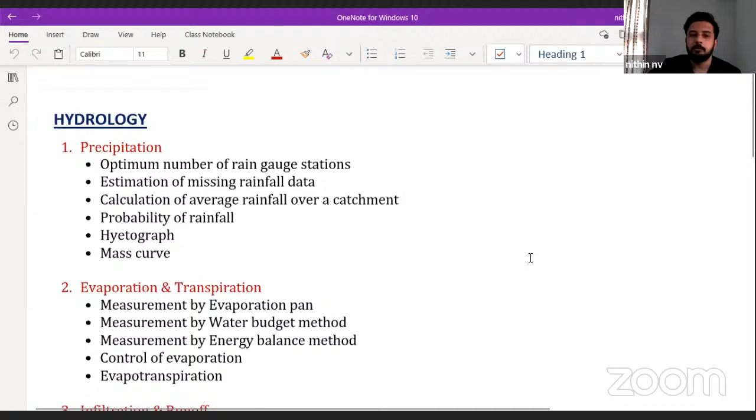Then coming to infiltration and runoff. I'm just giving a basic introduction so that once you have prepared, you can go through this portion and check whether you studied this point, this point, this point, like that.

Horton's infiltration curve is very, very important for gate examination. Similarly, phi index, W index, that is also very important. Then calculation of runoff, it is a subtopic of Horton's infiltration curve and all, is also repeatedly asked for 2 marks, which we are going to see through questions.

Then coming to hydrograph, I can tell you this is the most important chapter in hydrology. Sometimes they may ask from other chapters too. Flood hydrograph, direct runoff hydrograph, unit hydrograph - these three things are the topics we are going to study.

The other topics which I have written are the applications of unit hydrograph. We are going to see each and everything, method of superposition, when we are going to use this, how to approach a question. That is very important in hydrograph.

Whenever you are seeing a question, you should decide in which way I have to proceed. That is very, very important in hydrograph. That's what most students are making mistakes in the examination hall. You have to decide, or understand how to approach a question. Very important in hydrograph, that we are going to discuss.

Then coming to well hydraulics, sometimes you might have studied some portion of well hydraulics in geotechnical engineering also. Regarding aquifer, we have to study - aquifer can be unconfined or confined, that we are going to study. Recuperation test is a comparatively less important topic, but that also we will discuss. There is a chance of asking 1 mark or 2 mark question from there also.

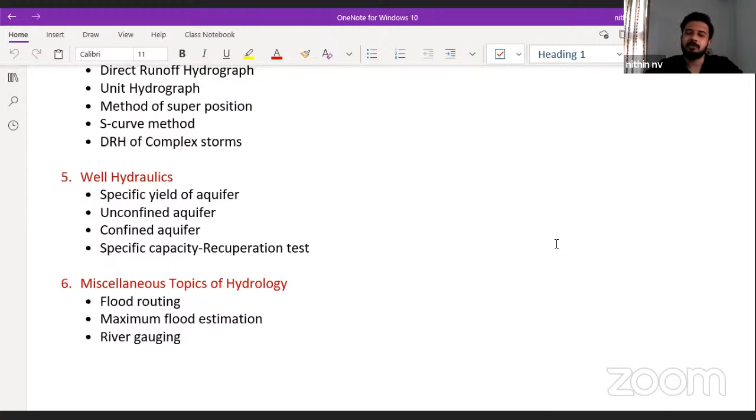Then coming to some miscellaneous topics, not that important, but some portions under this - flood routing, especially Muskingum method and all, repeatedly asked for 1 mark in competitive exams. Gate exam also they have asked. We'll do some numericals also under this flood routing. And regarding maximum flood estimation and river gauging, we'll discuss a few points which can appear in the gate examination.

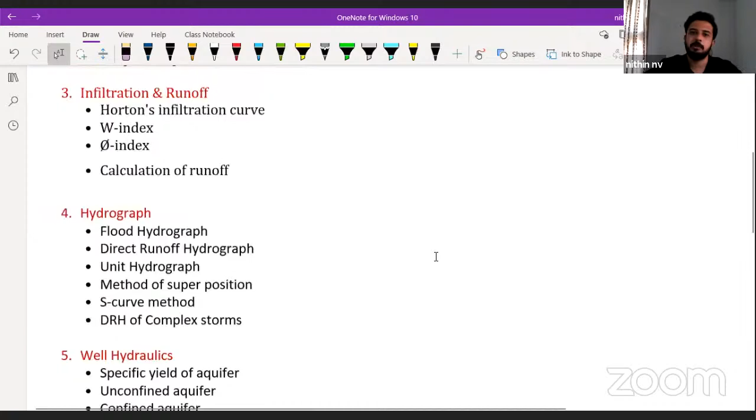So these are the topics we have to study very importantly under hydrology. Then irrigation - I have not written the subtopics here. Irrigation, definitely we are going to cover in the next session, part 2, which is going to happen tomorrow at the same time. And then I will discuss what are the things we are going to study under irrigation.

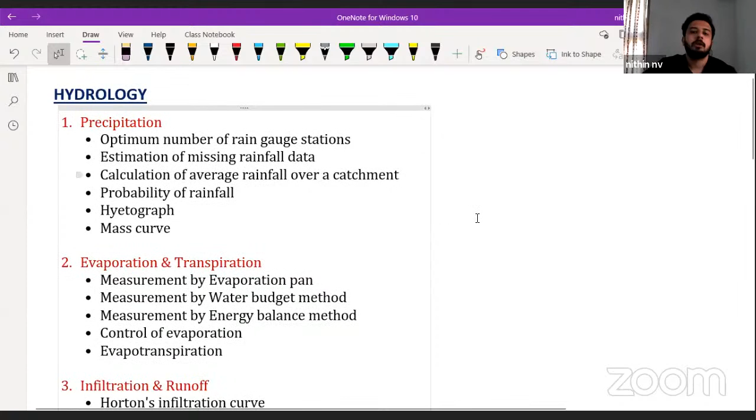In today's session, we will try to cover as many topics as possible under hydrology. We may finish with hydrograph only, because so many topics have to be studied under hydrology, that one by one we will study. Finally, at the end of the session, definitely you will be in a position to solve whatever questions they are going to ask in the examination. So I hope you got a rough idea regarding the hydrology portion.

Then directly we can go to the first topic, nothing but optimum number of rain gauges.

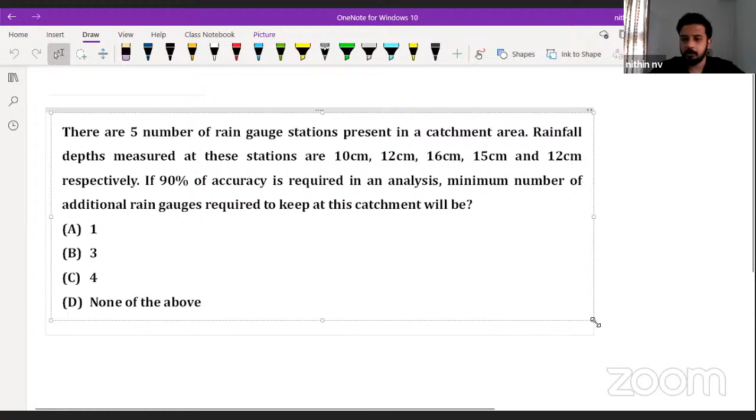I hope you have gone through it. No need to write the entire question, just take down the data. Once the subject is finished, we are going to give you the PDF of the questions, so don't worry. Now I am just giving the data.

First of all, what we need to remember is the concept of optimum number of rain gauge stations. Understand what is meant by rain gauge: it's the instrument we use to measure rainfall data. There are many names for this rain gauge - we call it ombrometer, pluviometer, and also hyetometer.

There is another instrument, the hygrometer. Hygrometer is for humidity - H-Y-G-R-O. Hygrometer, hyetometer - we are going to study regarding hyetograph as well. I will tell these points again.

So the rain gauge is the instrument we use to measure rainfall data. If we have some particular number of rain gauges in the catchment, we can also call it rain gauge stations. We need a particular accuracy for the measurement, then we can check whether we have sufficient number of rain gauges or not. So how can we calculate that? To check the sufficient number of rain gauges, we can also call it optimum number of rain gauges.

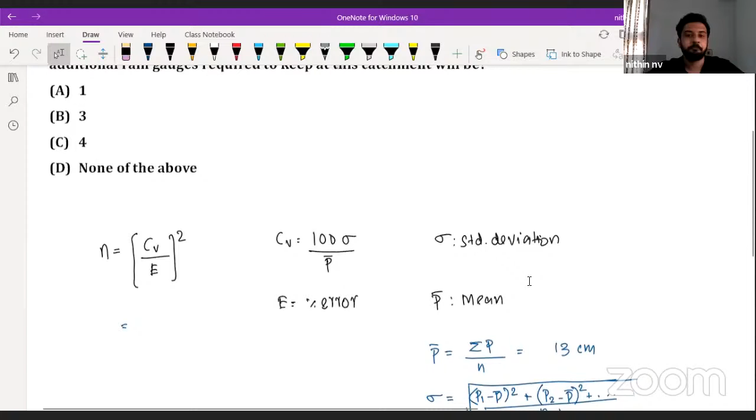So if you are doing this, how will you be getting the data? Please solve and tell me how much sigma value you are getting. 10 minus 13 will be 3, so 3 square - like this we have to substitute. Then 12, 16, so 12 minus 13, minus 1 square, I'm putting 1 square, it's simply the positive value, and so on, divided by the most important - you have to take 5 minus 1, that is the only thing you have to note down. Can you please tell me how much sigma you are getting?

2.44, okay thanks for replying. 2.449 - do one thing, no need to round it off. Directly you calculate. Once you get this value, directly multiply with 100, then directly divide with 13. Then you can take divided by 10 there itself, then square. No need to round off, no need to stop anywhere. Directly you can calculate. How much are you getting for CV? 18.84, thank you, yes very good.

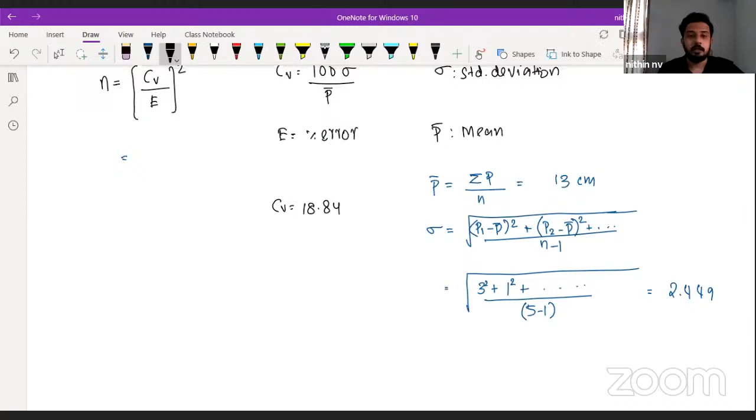Now see, very important thing - here we are already multiplying with 100, right? So whatever we are getting is directly in percentage only. That is why whenever we are substituting, this is another point you have to note down - this is already in percentage. So the CV value, or the error value, whenever we are substituting, if it is 10%, we got it as 100% minus accuracy, so that is going to be 10% according to our question. Don't substitute 0.1 here, substitute 10 itself, because both the numerator and denominator should be having the same unit, that is nothing but percentage.

Okay, how much are you getting? Yes, very good, please comment everyone, what is the answer? Thank you. 3.55, right. Now, if I am asking a question - our question is there, let it be there.

If I am asking, what is the optimum number of rain gauges? Tell me what is that answer? Very good, very good, what it is? 4, it is not 3, it is not 3.55, it should be 4. What is the meaning of this 3.55? If we need 90% accuracy, or we are okay with 10% error, at least you should have 3.55 number of rain gauges. What is the meaning of 3.55 number? It is a particular rain gauge - no, so if I have only 3, it is not sufficient, I require something more than 3. So minimum we need 4 number of rain gauge stations.

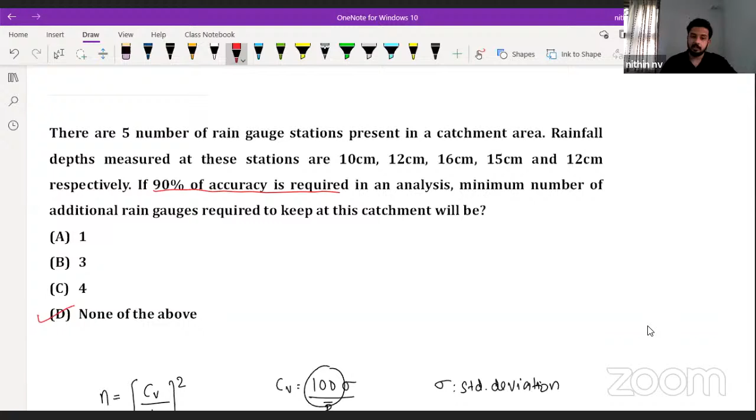Understood? Is it clear? Direct substitution - directly substituting the values in the equation, we are going to get the data. In case I'm telling some extra point - in another question, suppose they tell that there are 5 rain gauges present and we got optimum number equal to maybe 8. So if they are asking how many additional number we require - optimum number of rain gauge minus existing. Simply don't take the difference, properly check it. Is it clear? Understood? Few students were commenting option A also, that's why I'm telling. Is it clear now, everyone?

Yes, in this second example, it will be 3 then. Okay, understood now, everyone clear? Please comment, yes very good. Understood - that is the first point, optimum number of rain gauges. If you are getting both equal - okay, 5 rain gauge is the present number, and we are also getting 5 after calculation, which means extra is 0. If it is more or if it is equal, we don't require anything extra. Clear? Very easy thing.

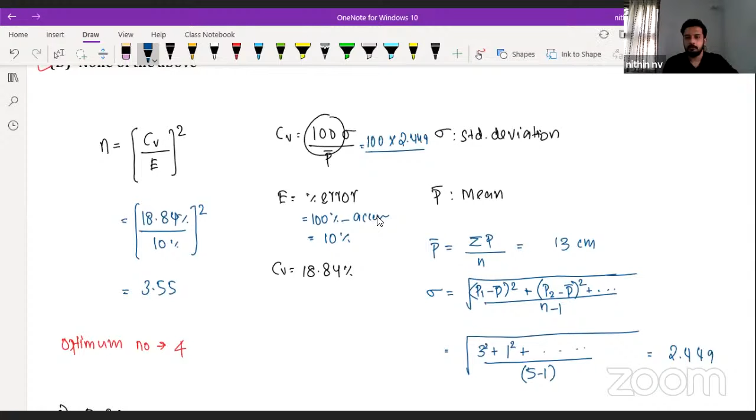Don't make any mistake in the exam. So for CV, what is the problem? Direct substitution: 100 into sigma divided by P bar. P bar we calculated as the average, nothing but 10 plus 12 plus 16 plus 15 plus 12 divided by 5, which gives 13. Then standard deviation equation: 13 minus 10 whole square plus 13 minus 12 whole square, like that. Since it is squared, 10 minus 13 or 13 minus 10 gives the same result. We get 2.449. Substituting in CV, it's 100 into 2.449 divided by 13. Is it clear now?

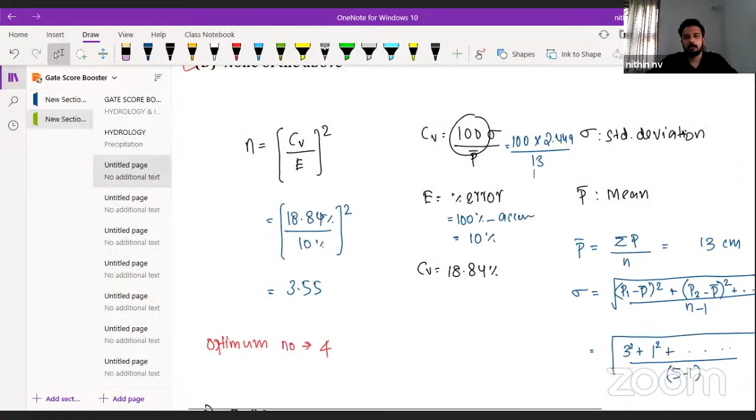Yes, very good. Now we are going into the next topic. Just read the question first and understand what they are asking. Then I will explain it.

One second, please hold on. In the last problem, one more additional concept I want to tell you.

The rain gauges can be either recording type or non-recording type. In the non-recording type rain gauge, we will only get the depth of rainfall, finally how much depth of rainfall we got per day or per week. In recording type, it records with respect to time. If I have a recording type rain gauge and want to know the rainfall at 10 o'clock yesterday, or at 12 o'clock, or at 4 o'clock, each time we can find the rainfall data separately. If we can measure the rainfall data at any particular time, we call it recording type - it records the time also. In non-recording type rain gauge, we cannot measure with respect to time.

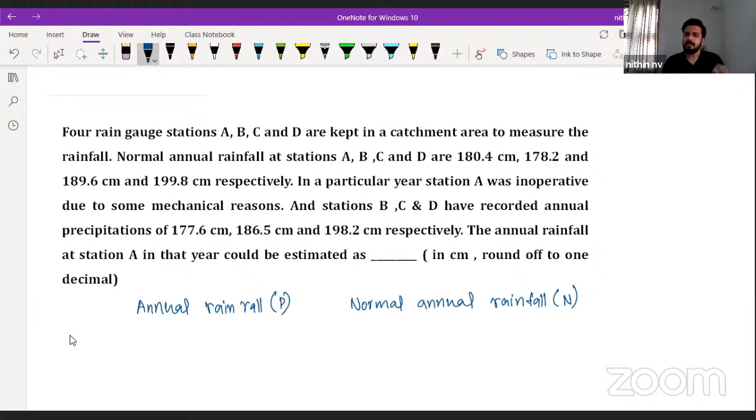That we call it as normal annual rainfall. This is the average of last 30-35 years of historical data. This historical data will be available, 100% sure, for all the stations or points. If we are measuring the rainfall in a particular year, say 2021 or 2020, we call it annual rainfall or mean rainfall, denoted as P. So P is the value in a particular year, and N, the normal, is the historical data.

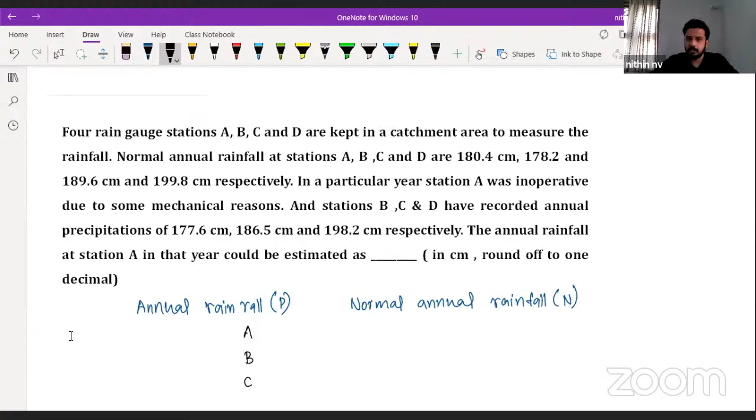If we have some number of rain gauges, the first is A, second is B, third is C, and so on. Taking this example, we have 4 rain gauge stations: A, B, C, D. In a year, we measure the rainfall at A as PA, at B as PB, at C as PC, and at D as PD. Similarly, the normal annual rainfall of all these rain gauges are NA, NB, NC, and ND.

These normal rainfalls will always be available for sure. In case in any year, if any value of P is missing, then using the normal rainfall data and the other P values, we are going to estimate that missing rainfall. So after reading the question, can you tell me which data is missing here? Whether PA, PB, PC or PD is missing. Everyone please comment which data will be missing.

PA is missing here, because it is given that in a particular year, station A was inoperative due to some mechanical reason. They have given the data of PB, PC, and PD: 177.6, 186.5, 198.2. So these 3 rain gauges were having no problem, but this one is missing.

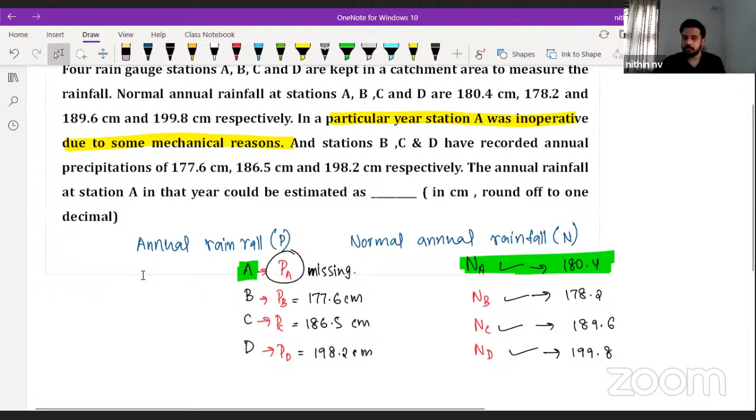How can we calculate that? Here I am writing the NA values: 180.4, 178.2, all in centimeters, 189.6, 199.8. Now whatever is the missing data, our rainfall corresponding to A is missing. Now correspondingly we have to select the normal rainfall N value, 180.4, and calculate a range of data which is 90% of NA to 110% of NA.

So what is this 90 to 110 percentage? It's a 10% variation from this NA value. Nothing but 90% of NA, 110% of NA. So if you calculate the range, how much do you get? 0.9 into 180.4 will be coming as 162.36, so 162.36 to 198.44 - that is our range.

Now what we need to do is check all these other N values and see whether they are in this range or not. I'm giving so much explanation because it is very important - for all the questions we may not have this much time to explain. Now check whether all the data is in this range or not. First one, 178.2, whether it is in this range?

Yes, NB is in this range. Second one, 189.6, whether it is in this range? Yes, that is also in this range. Now if ND is also in the range, we can go for simple mean method. Check 199.8 - no, it is somewhat outside the range. So this is not in the range.

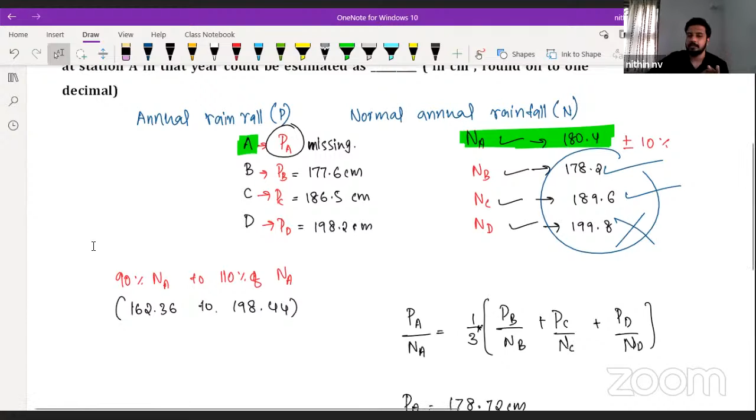Tripti, yes, very good. Is it clear, everyone? Now suppose the ND value was somewhat 190. Then how are we going to calculate PA? 177.6 plus 186.5 plus 198.2, divided by 3. In this calculation, we don't require the N value then. Clear everyone? Very good.

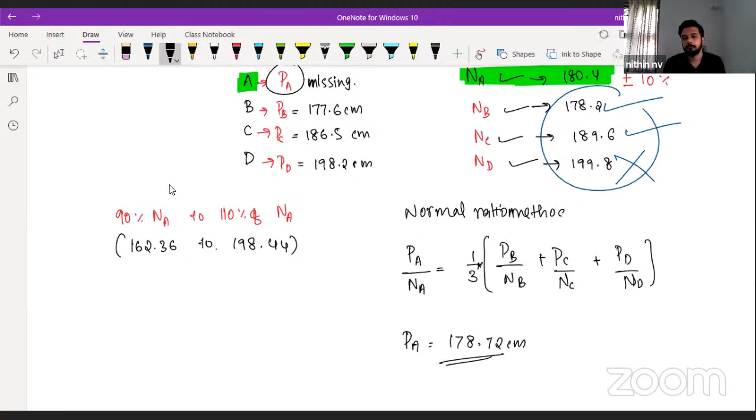So shall we go to the next topic then? We have seen optimum number of rain gauges, then missing rainfall data - which method did we use here? Normal ratio method, okay, right. Clear? Yes, 178.8 or 178.7, it's okay - it depends on how accurately you are doing the calculation. No need to stop anywhere.

Directly you can calculate - PB by NB plus, open the bracket. Even if you're not opening it, you will get the same answer, but just take it and check in the online calculator how it comes. Very good, okay, Sajid, Kushbu, very good. So shall we go to the next question? If any doubt, please let me know.

Now take the next data, next question, which is the next topic - nothing but calculation of the average rainfall or mean rainfall. Just go through the question and understand what to do. Just note down the data, no need to write the entire question - you can just draw the figure and take down the data. Whenever they ask for the mean rainfall, they will give you either a figure, or they will describe the figure in terms of sentences in the question itself.

Clear, everyone? I'm giving you some time to understand the question. I want you to think about it, please check it and tell me how much you are getting - no need to solve the entire thing. Meanwhile I will explain - we have 6 rainfall data points.

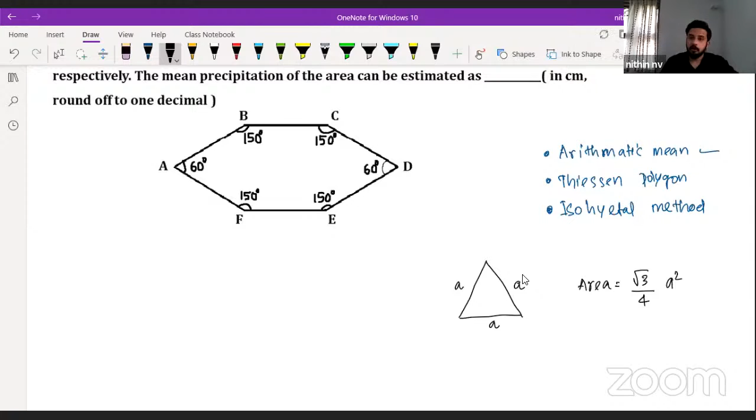Equilateral triangle area is nothing but root 3 by 4 a square. You can also calculate it by drawing a perpendicular here, and calculate what is this height. Then if you do half BH, finally you will be getting root 3 by 4 a square.

Now if we have 3 rain gauges here in the corner, if we are doing the Thiessen polygon method, what we are actually doing is drawing perpendicular bisectors for each of these lines. Whatever be the number of rain gauges, that many polygons we are going to get. If you have 3 rain gauges, one polygon will be formed here, another polygon here, and the next polygon here.

Like that, whatever be the number of rain gauges, that many polygons we are going to get. If it is an equilateral triangle, each area will be 1/3 of the total area, nothing but 1/3 of root 3 by 4 a square. That is for an equilateral triangle. Similarly, if it is a square, we are going to get 4 equal parts, each polygon being 1/4 of the total area. This explanation I have done in detail in last year's video, if you want more explanation you can watch that.

Now, if we have regular shapes, for example a regular pentagon or regular hexagon, see, if you have a regular hexagon, what is the meaning of regular hexagon? All the sides will be equal, and all the angles also will be equal.

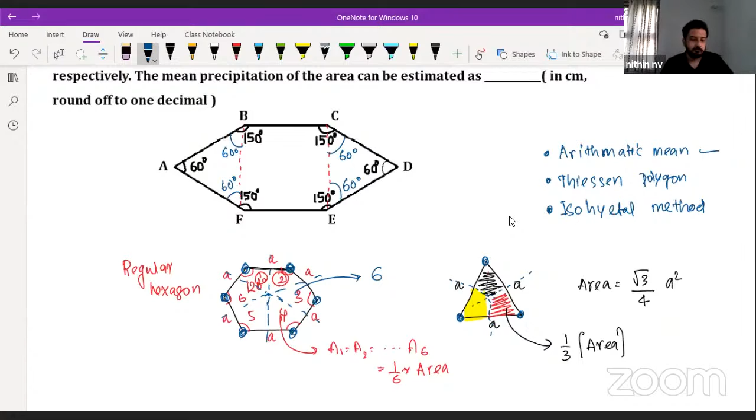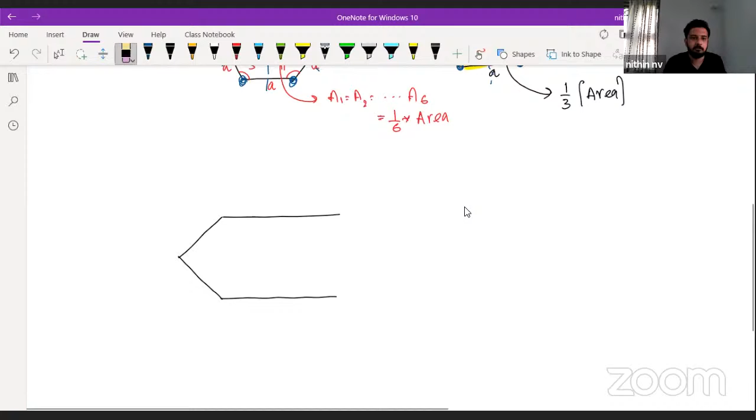So can you split that? How to draw the Thiessen polygonal areas? It will not come exactly - the dimension which I am drawing will be having little bit difference. How to draw it? This is how we are having it. How to draw the Thiessen polygons?

What are the steps? Just draw the perpendicular bisectors to all these lines. So we are just matching, or combining all of this, and we are going to draw Thiessen polygons. So we are going to finally get something like this. Draw it properly on the notebook, it will be easier.

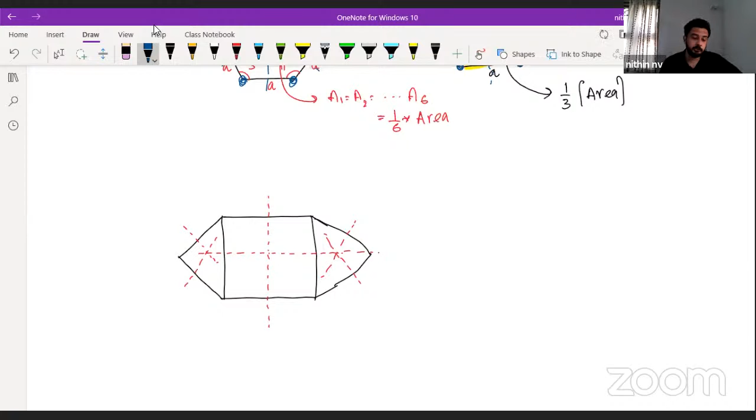Are you getting something like this? Tell me how many polygonal areas you should be getting - 1 rain gauge here, 2, 3, 4, 5, 6. Tell me how many polygonal areas I should select. Everyone please comment. Very good, 6 polygonal areas. So how are we going to select it?

Definitely this is for this guy, this portion is for the second one, then these many portions will be for the third one, and so on. Finally how are we going to get it? Everyone please draw it - I have just made a figure for your better understanding. Are you going to get something like this? Just for your understanding, I have just colored it and all.

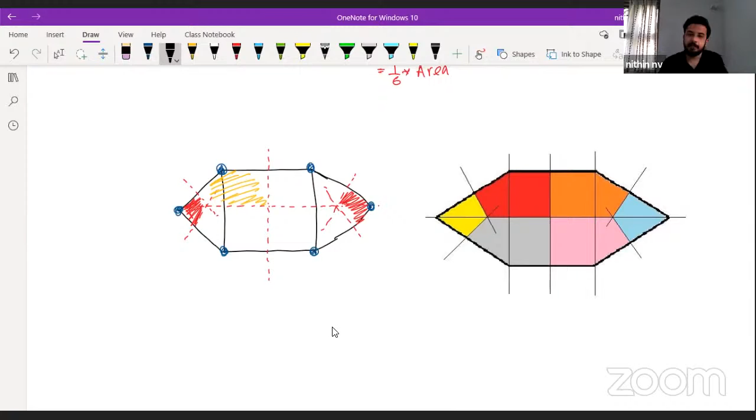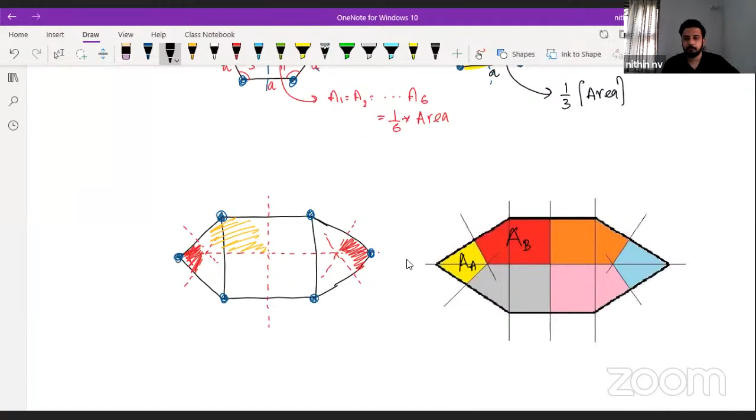Clear? So if you simply name it as they have given the name A, B, C, D in the clockwise direction - this is the area corresponding to A, this is the area corresponding to B, AC, AD, AE, and AF. Is it clear, everyone? Very good. So what will be the area AA?

AA and AD will be equal, that will be 1/3 of that triangular area. If we are selecting that triangular area, what is one side? They have given in the question that each side is 10 kilometers. So each side is 10. All are 10, so once we are getting 60, 60, 60 as angle, which means this side also will be 10 kilometer.

So that is 1/3 of area of equilateral triangle. So what will be that? 1/3 of root 3 by 4 a square. A is nothing but side of the triangle, which is 10.

AA and AD are equal, tell me how much is that area? Yes, very good, 14.43. That particular area. So we have two areas of 14.43 kilometers square, one is this AA and one is this AD.

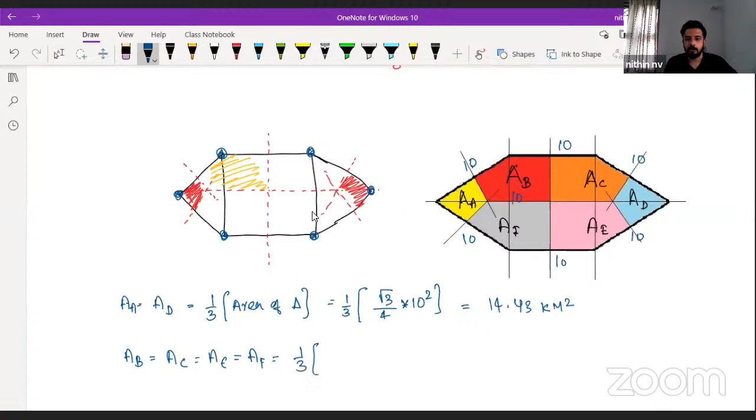Now what about AB, AC, AE and AF? Will it be equal or different? All these areas are going to be equal. AB, AC, AE and AF will be equal. What will be that? 1/3 of this triangular portion plus 1/4 of the square. So 1/3 of area of triangle plus 1/4 of square.

This much portion we already calculated, which is 14.43 kilometers square. Then what will be 1/4 of the square? 10 into 10, so 25 plus 14.43. How much are you getting? Everyone please comment. 25 plus 14.43 will be around 39 something. Thank you, 39.43 kilometers square.

Is it clear, everyone? All are getting the same? All area will be same, 39.43. Very good, very good. Okay, hope all are getting it.

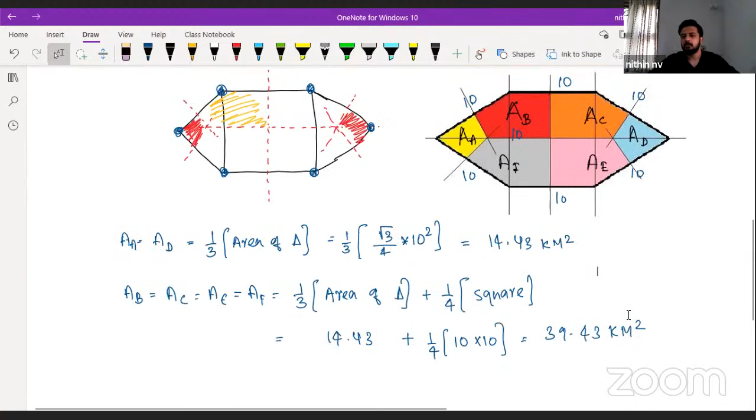Now it's very simple, we got all the area. Now what do we require? According to Thiessen polygon method, what is our equation? P average is equal to P1 A1 plus P2 A2 plus etc, whatever be the rain gauges we have, if it is n, then Pn An divided by total area. Total area is nothing but sum of all these Thiessen polygonal areas.

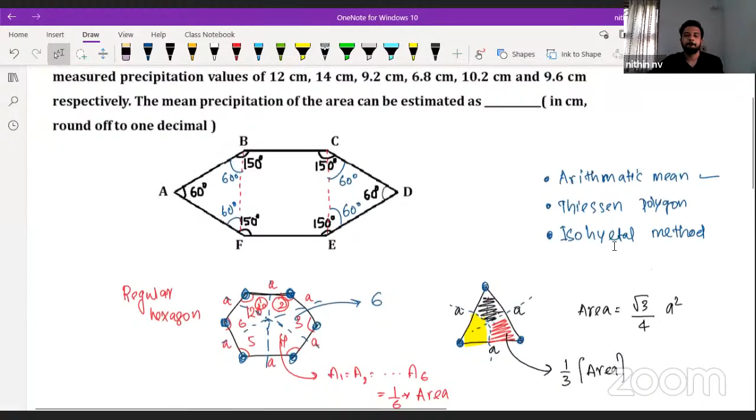Here we have named A, B, C, D and all. So properly this is the next point you have to take care of: corresponding to A, what is the value of precipitation? It is 12 centimeter, so that properly you have to check. Corresponding rainfalls you have to take. So the rain gauge A is having 12 centimeter. The Thiessen polygon area of rain gauge A is 14.43. So how we have to substitute the value?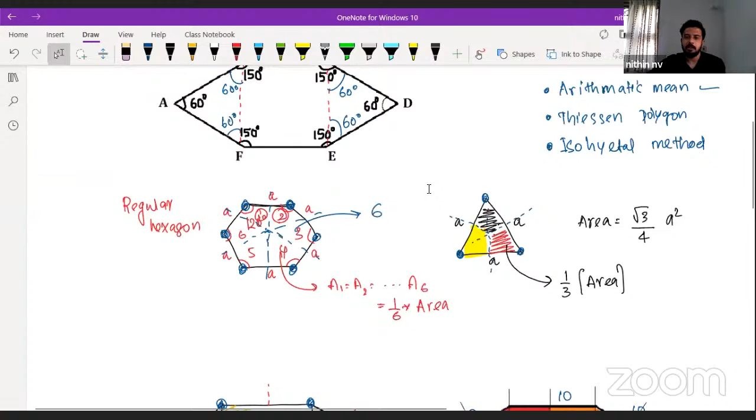Corresponding to it is 12 centimeter, so 12 centimeter into 14.43 kilometers square plus what is PD? Either you can write PD there, or you can just combine 12 also with this D. What is D? A, B, C, D, so 6.8. Rain gauge A is having 12 centimeter, rain gauge D is having 6.8 centimeter, both are having same area 14.43.

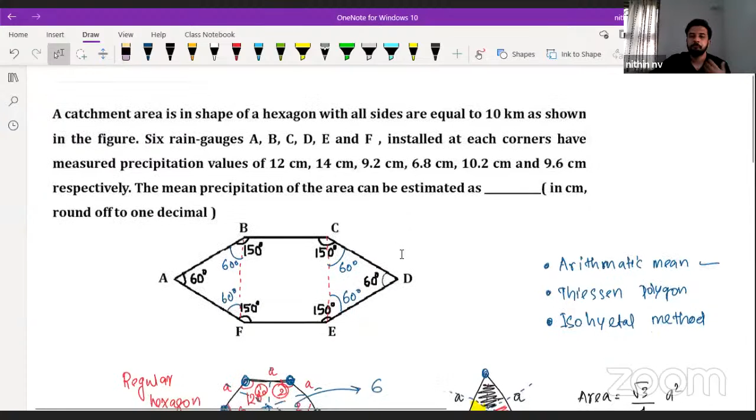So directly you can do 12 plus 6.8 multiply with 14.43, plus the remaining area 39.43 into the sum of remaining P values. If I'm simply writing in the general sense, next one is 14 centimeter, so 14 centimeter multiply with 39.43 plus etc, all the things you have to write.

Whole divided by, you just add all the area. For triangle we have root 3 by 4 into 10 square, root 3 by 4 a square. So like that, two areas we are having, plus we have a square of 10 kilometers side. So either you can do like this: total area, or 14.43 into 2 plus 39.43. We have 4 pieces. How much are you getting?

Yes, please everyone comment how much you are getting, calculate and tell me the final answer. 10 point, very good Krishna, 10.54 is the right answer. Very good, okay, approximately if you are getting 10.5, that is correct. It depends on how accurately you are taking the data. Even this, whatever I have written, is also not accurately correct now, because it may be 10.433 something you may be getting, depends on how you are rounding off.

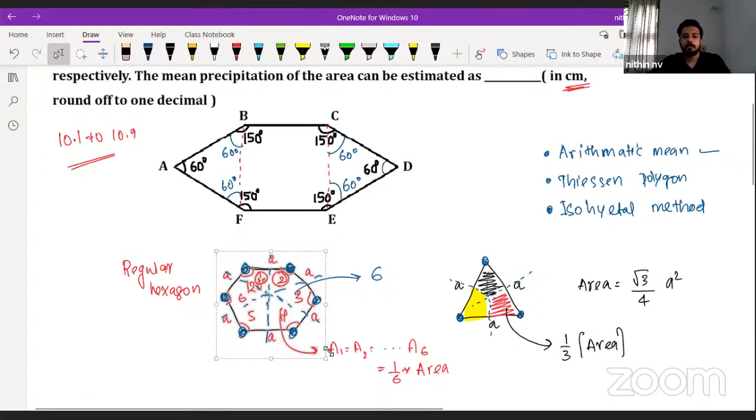One more extra point I can tell you - we have already mentioned this extra point for a regular hexagon. I told you, in case they give a regular hexagon, we know all the data A1, A2, etc. All the data are equal to 1/6 of the total area. Now we don't have to calculate those areas. What is this A1 actually?

This A1 by total area, we can rewrite as P1 W1 plus P2 W2, etc., where W1, W2, etc. stand for Thiessen weightages. A1 by total area is W1, A2 by total area is W2, etc. If you add all those things, what do you get? A1 by total area plus A2 by total area, etc. Sum of W1, W2, up to Wn - tell me how much it will be, everyone? Very good, it is equal to 1.

That also can be a 1 mark theoretical question. Or simply, see what they can do - they can give any figure with 3 weightages, and the 4th weightage they may not give. Or 3 areas they can give, and the 4th area they may not give. Then what can we do? If there are total 4 areas, the sum of Thiessen weightages will be equal to 1, so from there you can calculate the 4th one.

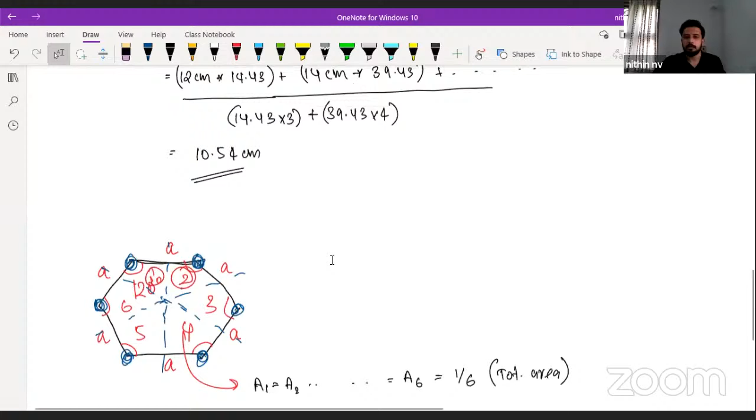Now if they are giving a regular hexagon, either they can mention in the question that it is a regular hexagon - suppose like this. In the question, they can give it in the form of a regular hexagon, then they will not give the figure. Then the figure will not be like this - it will have angles 120, 120, 120 and all. Understood? So once they give it like this, it's a regular hexagon.

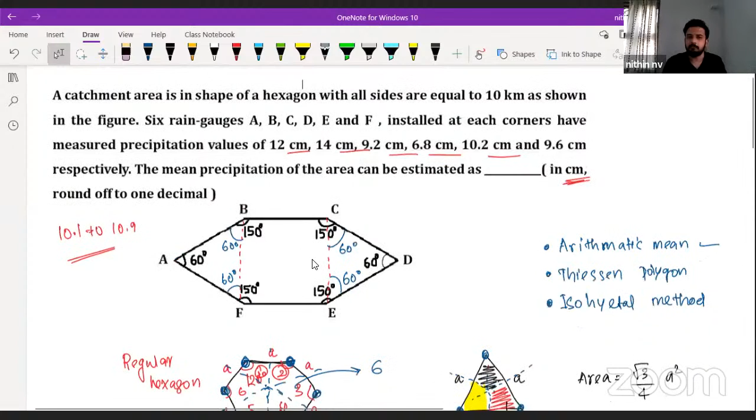Then there's no need to calculate the area at all. Whatever side they give, no need to calculate the area and waste your time. Directly, if they are giving a regular hexagon, what can we do? P1 into W1 will be 1 by 6, plus P2 into W2 will be 1 by 6, etc., plus the final value P6 into 1 by 6. So directly like this you can calculate. Clear, everyone?

Now one more extra point - suppose they give you a regular hexagon and they give an extra, a 7th rain gauge at the center. Now can I take all the rain gauge areas as equal, and take W1 equal to W6 equal to W7, equal to 1 by 7? If this is 1, 2, 3, 4, 5, 6, 7 - is it correct or wrong?

Very good, it's absolutely wrong - we cannot take it like this. Note down that. You can practice and check how the polygonal areas are coming.

Actually, we will be getting 18 equal pieces. You can directly remember A1, A2, etc. up to A6 - till A6 definitely it will be equal, and that will be equal to, as I told you, out of the total 18 pieces, each area will be 2 pieces out of this 18 pieces, that is equal to 1 by 9 of the total area. You can remember this or practice later to confirm. What is the meaning of this? W1, W2 equal to W6 will be equal to 1 by 9. And what remains? 6 pieces out of 18 pieces for the remaining area.

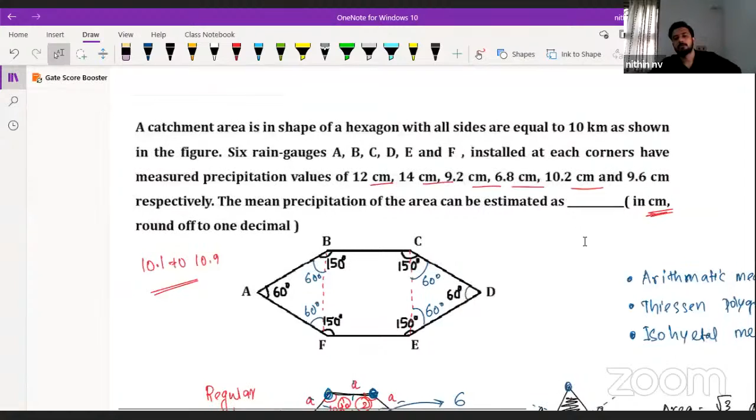Yes, so take this question now. As I already told you, there is high chance or high possibility for asking an MSQ in this probability of rainfall. If the examination question setter wants to make an MSQ, it's very easy to make an MSQ from probability concept. So just read the question first of all and understand what is given.

Only one data is given. A flood of certain intensity is expected to occur once in 25 years. What is the meaning of this 25? What is the meaning of that sentence? A rainfall or a flood or anything, tsunami or anything, is expected to occur in 25 years. Means what? What is equal to 25 years? Everyone please comment. Very good.

Frequency or return period, we used to denote it by capital T. Just remember other names of return period. Either we call it as frequency, or we call it as return period, or we call it as recurrence interval, that you can see in the first option.

Recurrence interval is another name of frequency or return period. So from the question data itself, what are you understanding, whether the first option is correct or not? Obviously option A is wrong, because recurrence interval is the synonym, another name of the return period or frequency or time period. So 25 years is the recurrence interval. They have given that it is 50 years. Option A is obviously wrong.

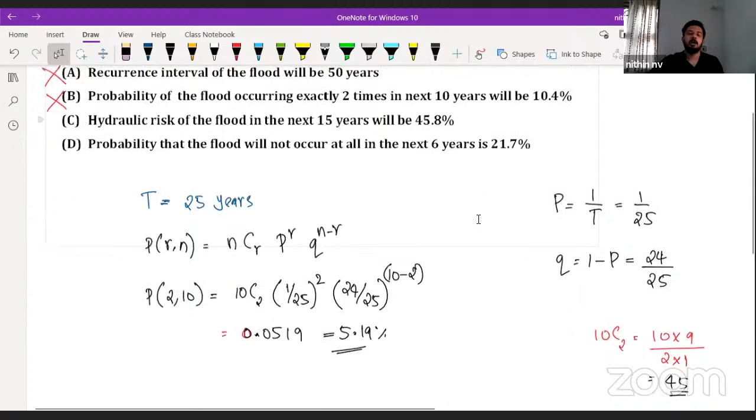Now, what about the third one? Hydraulic risk in 15 years. What is the meaning of hydraulic risk? Very important. Hydraulic risk means, suppose tsunami is happening once. Is it a risk for us? Obviously, yes.

Tsunami is happening 2 times, is it a risk? Obviously yes. 3 times? Obviously yes. Tsunami is not at all happening, then it is good. So risk means what? Anything. Either it can happen once or 2 times or 3 times or 4 times, whatever. Which means P of number of occurrences can be 1 or 2 or 3 or 4. It can be any times.

So can I write it as 1 minus P of R equal to 0? Yes. Then what is P of R equal to 0? NC0, P raised to 0, Q raised to N minus 0. How much is NC0? That is 1. P raised to 0 is 1. Anything raised to 0 is 1. Q raised to N. Understood?

So P of R equal to 0 is nothing but Q raised to N. So what I can write? Hydraulic risk is equal to 1 minus Q raised to N. What is this N? In how many years? Now, what they have asked? Hydraulic risk of the flood in the next 15 years. How can we calculate then? Risk in 15 years, how can we calculate?

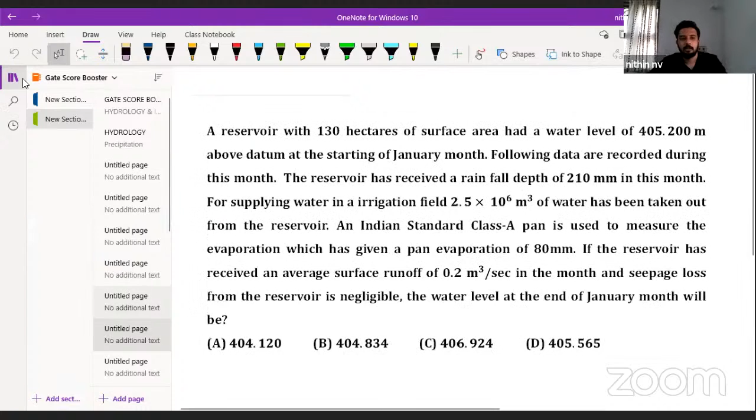Now, before going into the next topic, let me tell you about hyetograph and mass curve. So what do you mean by hyetograph, our next topic? It's nothing but a graph with intensity of rainfall on the y-axis and time on the x-axis. What do you mean by intensity? In each hour, how much rainfall - we can put it in mm per hour, centimeter per hour, or mm per second, it's up to us. Suppose here we put it in hours.

Suppose we have a bar diagram and each bar indicates some intensity - for example this is 10 mm per hour, this is 8, this is 9, this is 5. This is just an example, not to scale - let me change the data: this is 6, this is 7, this is 3. And time I'm writing as 0, 1, 2, 3, 4.

If I ask you, what is the total depth of rainfall in the third hour - how can we calculate it? This is the first hour, second hour, third hour. It's nothing but the area of the hyetograph in that particular hour. So 3 mm per hour into 1 hour equals 3 mm. Now, simply, what is the total depth of rainfall - everyone please tell me.

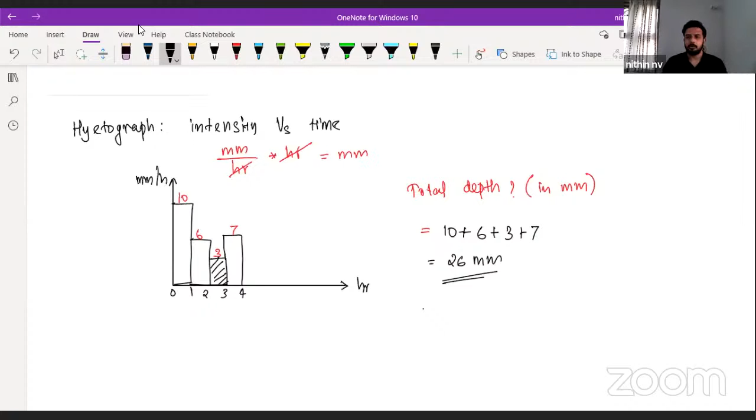Area under rainfall hyetograph, or by default hyetograph means rainfall hyetograph, is nothing but the depth of rainfall. What will it be? 10 mm per hour into 1 hour gives 10 mm, plus 6 mm per hour into 1 hour gives 6 mm, and so on. So what do we get? 10 plus 6 plus 3 plus 7, 26, correct? This is nothing but hyetograph.

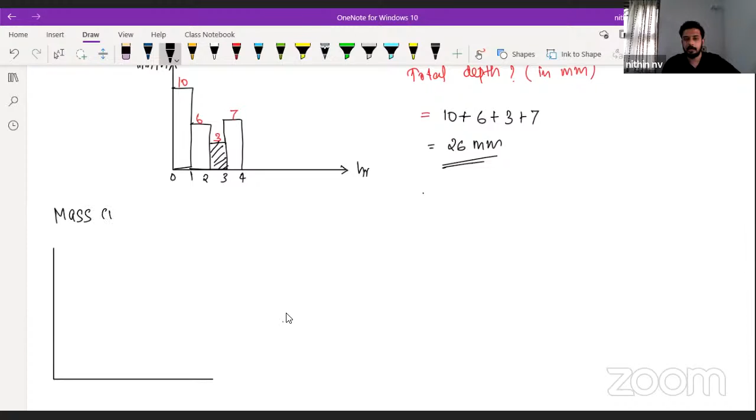Now the next one is mass curve. What do you mean by mass curve? Nothing but if you are taking the cumulative depth of rainfall. Suppose I'm putting this as mass curve heading here - this is nothing but cumulative depth. What do you mean by cumulative depth? Nothing but we keep on adding with the previous one. So this is time in hours.

If we take the same example, in the first hour we have 10 mm. Now in the second hour, how much total rainfall do we have? We get an additional 6 mm, so totally it becomes 16 - 10 plus 6. So in the second hour we have 16. In the third hour we get 3 extra, making it 19. In the last hour we get 7 extra, so total it becomes 26.

Understanding? Sometimes they can simply give a graph like this, instead of giving a bar diagram and all, they can give something like this. So a mass curve will always be either constant or increasing - it will not come down. If no extra rainfall is happening, then the mass curve will go straight at a constant value. Extra is nothing. Is it clear, guys?

What is the difference between a hyetograph and a mass curve? Is it clear? Everyone please comment yes or no. So what is more important for us? In case they are giving a mass curve, from that we have to understand what is happening in each hour, because in many questions we require that.

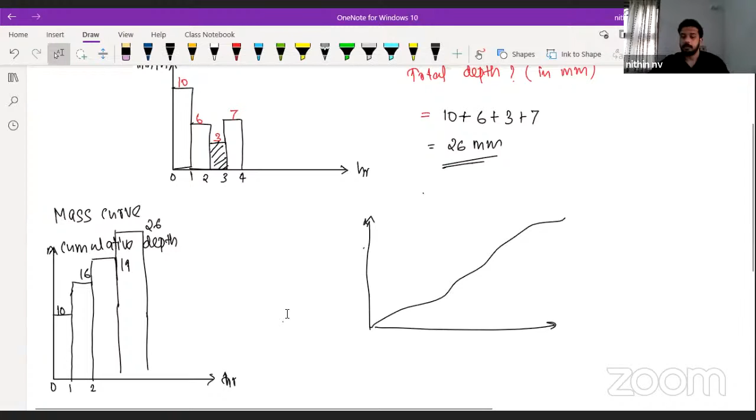I hope it is clear what is hyetograph and mass curve. After some time we are going to study another hyetograph, which is nothing but effective rainfall hyetograph. So this is rainfall hyetograph - by default, hyetograph means rainfall hyetograph only. After some time we will study effective rainfall hyetograph, where area under effective rainfall hyetograph equals runoff depth. Here, area under rainfall hyetograph is rainfall depth. That is a very minute point you have to note down.

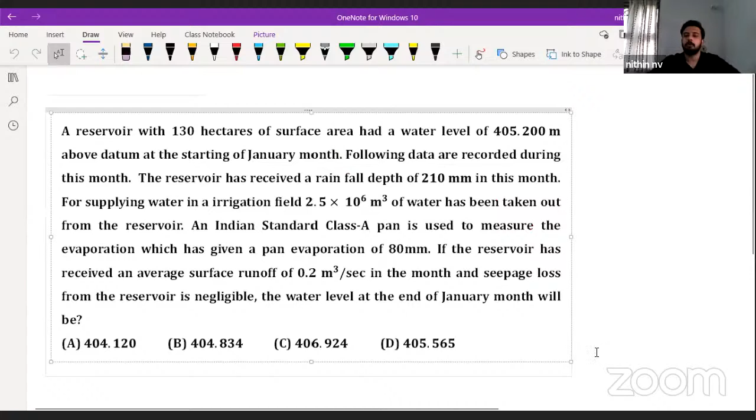Now we are moving into another important concept from hydrology, from the evaporation portion. Just read the question and understand what they have given. This question is related to the water budget method - whenever they ask this, the data will be very lengthy. Don't think the solution is very lengthy; the solution will be very simple, but the data will be lengthy. So don't simply skip the question and move to another one in the exam hall. Particularly in irrigation and hydrology, question length will be too much, but the solution steps will be very few. Properly read the question and take down the data. It's very easy, related to water budget method. Inside this, I have also used the pan evaporation method, so two topics I have combined into one question. So properly read and take down the data.

If you have noted down the data, let me know so I can explain. Surface area is given, that's the first data. Water level is given, then rainfall depth is the third data. Some water we have taken out, fourth data. Then class A pan, Indian standard class A pan, is used. Pan evaporation is given, next data. Surface runoff is given, that's it. Seepage loss is negligible. They are asking for the final water level. Hope you have taken down all the data.

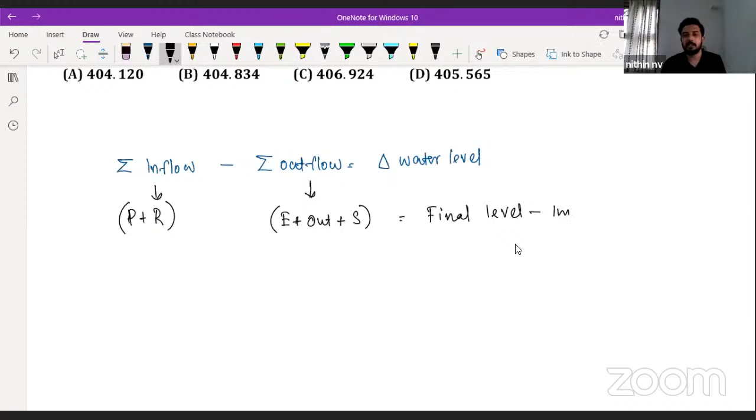What are the inflow values? Nothing but precipitation and runoff, which will contribute to the water storage. What are the outflow values? If evaporation is happening, water will be lost from the reservoir. And if we are taking water for irrigation or electricity production, water level will decrease. So water we are taking out, plus if seepage is happening, storage in the reservoir will also decrease. So these three portions reduce the water level in the reservoir or water course, while precipitation and runoff contribute. That equals the change in water level, which is always final water level minus initial. Don't take initial minus final, otherwise you'll get the opposite answer — the plus or minus will change. That is very important for us.

Now take down the data. What is the precipitation given in the question? Directly given as 210 millimeters. Now see guys, very important: once you are substituting data in millimeters, all the data should be in mm. Once you're substituting in centimeters, all data should be in centimeters, and so on. I am simply putting it in mm as of now. If you want to put it in meter cube, meter, or centimeter, it's completely up to you — later we can convert.

Plus the runoff value — what have they given? 0.2 meter cube per second. If I'm substituting like this, can I add this directly? Obviously no. So what do we have to do? That value has to be converted into millimeters. So the runoff value given as 0.2 meter cube per second — how can we convert this? How can we convert this into millimeters?

First of all, this is a discharge rate. We have to eliminate the seconds and make it into meter cube. Then that meter cube we can divide by the area, making it into meters. Then we can multiply by 1000 to make it into millimeters. Whenever we get a discharge value, that's how we convert it.

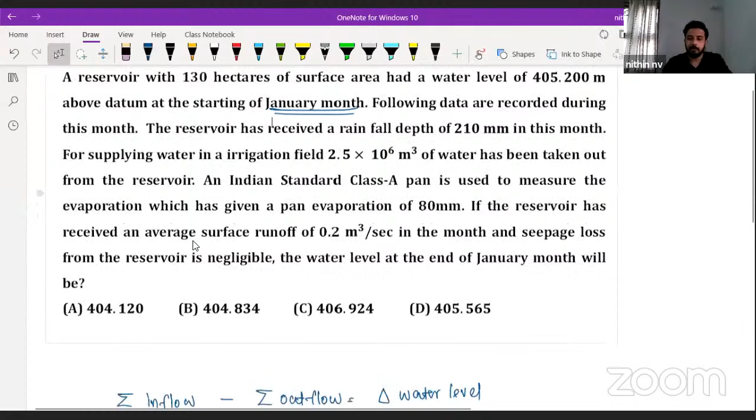0.2 meter cube in 1 second. Then what have they given? In January month. How many seconds are there in January month? We know in 1 minute we have 60 seconds, then in 1 hour, then in 1 day. Multiply by 60 to get per minute, multiply by 60 again to get per hour, then multiply by 24 for per day. In January month, how many days do we have? 31 days. So this much meter cube we are getting.

Now we have to convert into depth term. How can we convert? By dividing with the surface area. What is the value of surface area? 130 hectare. Should I convert into any form? Obviously we have to convert into meter square, then only meter cube and meter square will get cancelled. So remember: 1 hectare is equal to 10 raised to 4 meter square, or 1 kilometer square is equal to 100 hectares. We'll discuss this in detail in irrigation also, first chapter, very important. So 130 into 10 raised to 4 meter square.

So how much are you getting? Everyone, can you comment how much runoff you are getting, in how many mm? So 0.412 something you are getting now, in meters. So that is equal to 412 point something. So let's make it in millimeters now — make it accurate.

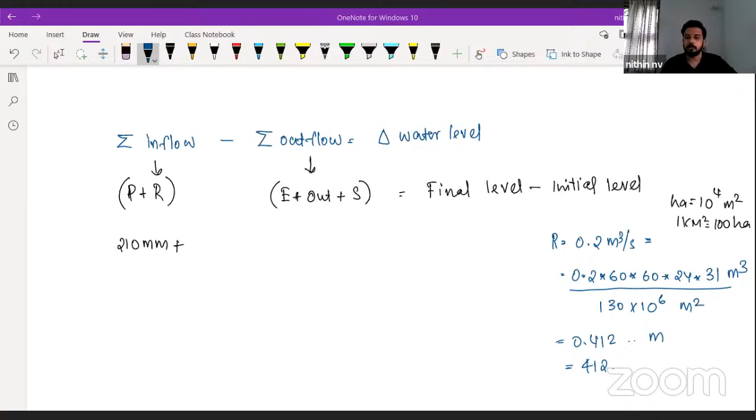Millimeters, at least 1 decimal or 2 decimal. 412, yes, okay thank you. So I'm putting 412 here. That will be there, okay, 2 decimals I'm keeping. Minus.

How much is evaporation, guys? They have given 80 mm now. So can I take 80 mm? Is it correct? Can I take 80 mm here? Vishal, I will come to that, don't worry. Can I take 80 mm? Very good, this is wrong.

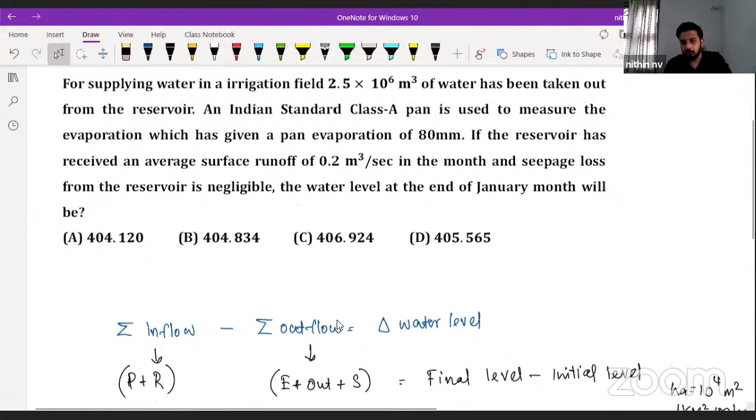Why is this wrong? That 80 mm is given as pan evaporation. So how can we calculate evaporation from the water course using the pan evaporation? Very important: pan evaporation multiplied with coefficient of pan is equal to evaporation from the water course. Very, very important. But more important point is whenever we are writing this equation, this should be in terms of depth, okay, it is not in meter cube, it is not in meter cube per second. It should be in terms of depth of evaporation.

Okay, so pan evaporation is given as 80 mm. We have to multiply with the coefficient to get the evaporation from this particular reservoir. But do you know what is this coefficient of pan? Whether they have given anything in the question?

Very good, they have not given, but they have given that it is Indian Standard Class A pan. See, for GATE examination, they may be giving, definitely they will give this coefficient of pan in the question itself. Simply just going into the next level, I have not given. Remember at least this one: the Indian Standard Class A pan is having a coefficient of 0.8.

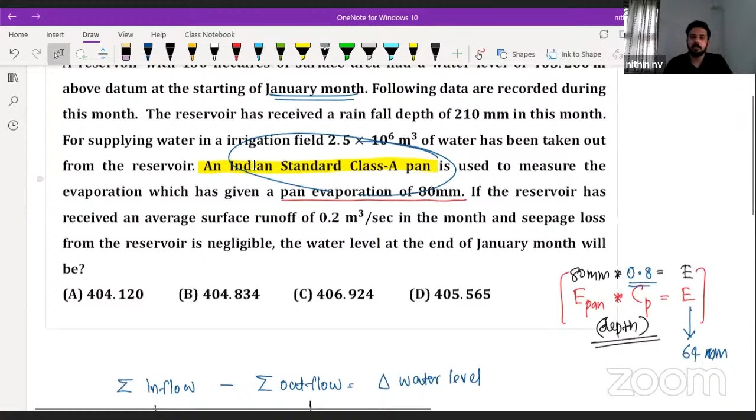So how much is our E value? 0.8 into 80 mm, 64 millimeters. Clear, guys? Yes, very good. I'm already getting the answer. Very good, so E value we have to substitute as 64 here.

How much value we have taken out? In the question they have given that 2.5 into 10 raised to 6 meter cube. Okay, they have given in terms of volume directly. Water taken out is equal to 2.5 into, sorry, how much they have given? 2.5 into 10 raised to 6.

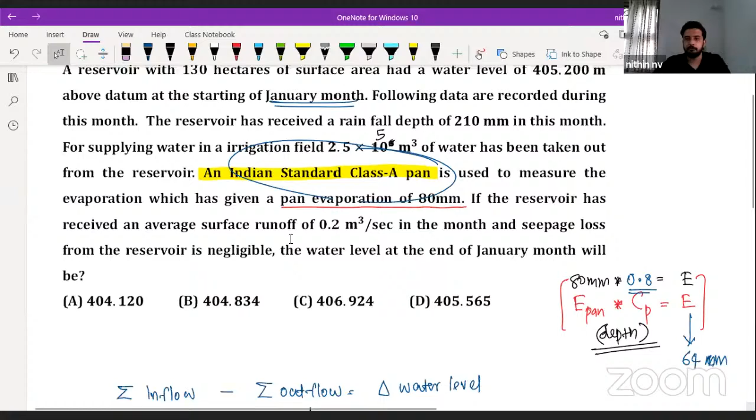Do one thing, just make it 2.5 into 10 raised to 5 because otherwise I cannot check your calculation. Please make it 10 raised to 5, okay, 2.5 into 10 raised to 5. Then only I can check your calculation because I have the final data. All the options I made accordingly only. Make it 2.5 into 10 raised to 5 meter cube.

Okay, so if you are doing 2.5 into 10 raised to 5 meter cube, 130 into same procedure, okay, how much you are going to get? Let me also verify, 1 second please hold on. Let me verify whether it is 5 or 6.

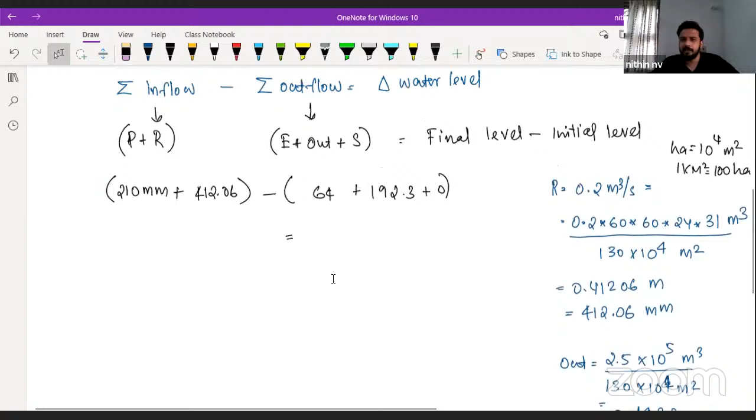Starting, at the starting of the reservoir, starting of the month, means initial level they have given 405.2. So final water level we don't know, that is what we have to calculate. Initial level is 405.2 meters, so let it be there in meters.

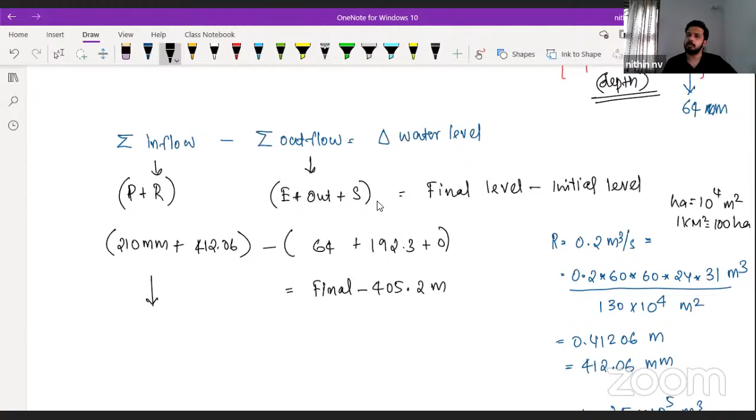How can we calculate this? We have to convert that into millimeter. Okay, either you can put 405,200, keep it there, or you can just calculate this left hand side, then convert into meter. It's up to us, okay. So if you are calculating, what you will be getting?

210 plus 412.06 minus 64 plus 192.307. Okay, is equal to, yes.

So how can you calculate this? Final water level minus initial water level will be, can you calculate this and tell me what is this value? Can you calculate this left hand side and tell me, are you getting 365.7 something?

I just want to confirm my answer also. Are you getting this on the left hand side? Millimeters in terms of millimeter. I can also write like this.

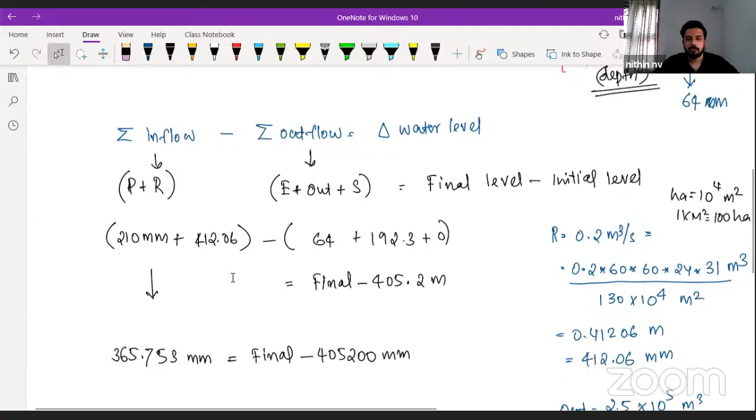Yes, okay, thank you. So using this you can calculate the final water level. Final water level will be what? 405,200 will go that side plus 365.753.

Yes, 405,565.75. Like that are you getting?

Yes, very good. We need it in meters. So 405.565 meters. Or you can convert, just make it this into meters. Okay, it's completely up to you. Only thing is proper conversion should be there.

That's all. Very good. Are you getting the same answer? 405.565. Which option it is? Option D, na? Yes, very good.

Are you getting option D? Please compare my answer with your answer. Sure that you are getting the same. Yes, very good. Getting everyone?

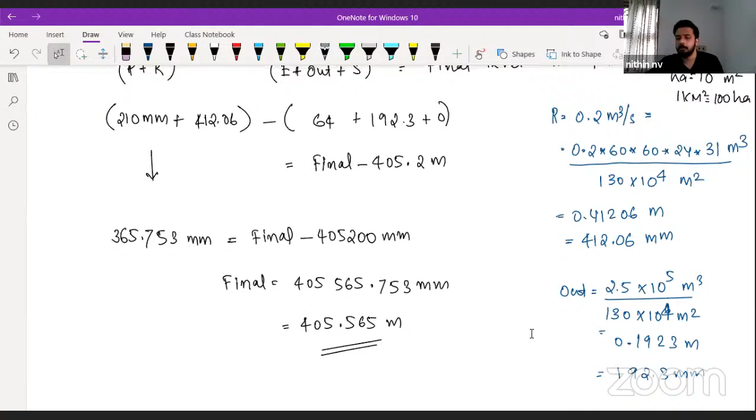Yes, that's it. So only thing you have to note down is, whenever you are substituting, all the things should be same. Unit should be same. Sometimes they can give in meter cube, or they can ask what is the change in water level in meter cube. Only thing is to convert in between meters or depth term and the volume term. We just have to use the surface area: multiply with surface area to get it into volume term, divide with surface area to get it in depth term.

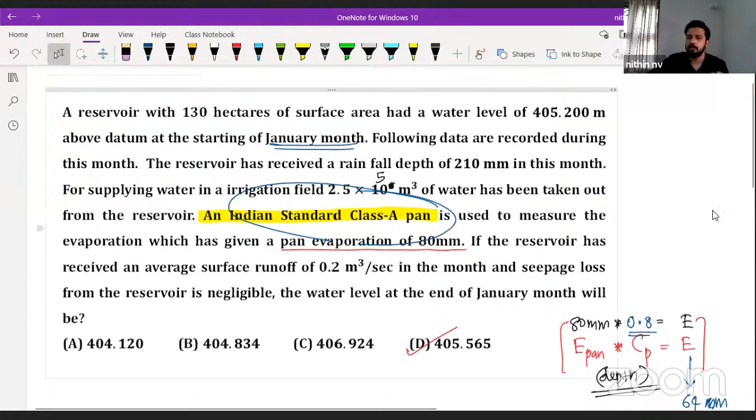That's all. The next point you have to remember is this: if they are giving pan evaporation, properly multiply with CP value and make it into evaporation from the reservoir or lake, whatever it is, and whichever month they are giving. They will not give you February month and confuse whether we should take 28 or 29 days. They are not going to make it like that. Either they can give the number of days or they can give in a week. Then no need to give which month it is. If they are giving in a week, just multiply with 7. As simple as that.

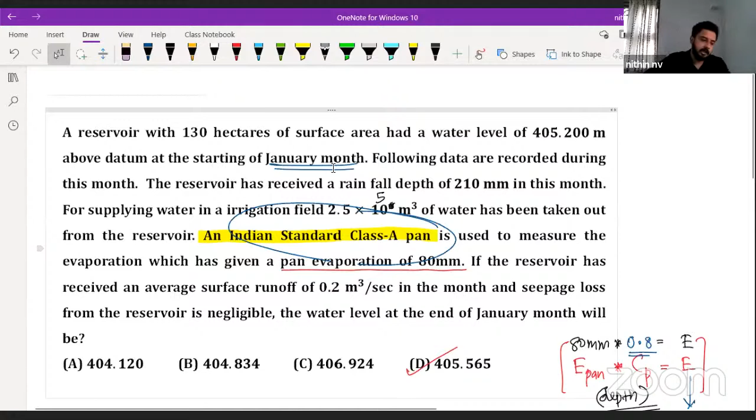Is it clear, guys? Yes, very good. All are getting D? Anyone not getting D? Properly check the calculation, conversion and everything. And this also, hectare into meter square conversion, 10 to the power 4. Hope you understood. So shall we go to the next question then?

Okay, so before going into the next chapter, these are actually unimportant: the energy balance method and all. How can we calculate the evaporation using energy balance method? The rate of evaporation E is equal to solar radiation energy R divided by density of water into latent heat of vaporization.

If they are asking the question, they will directly give you everything. R stands for solar radiation energy, in watt per meter square they will give. Gamma W is nothing but density of water. If nothing is given, we can assume 10 to the power 3 kilogram per meter cube. L stands for latent heat of vaporization, they will give in the question. We have to substitute in joule per kilogram.

So once you are substituting all this data, you will be getting the value of E in meter per second, nothing but rate of evaporation. So if they are asking per month or per week and all, properly you have to convert, multiply with that time, and you will be getting in meters. Understood? So rate of evaporation is equal to solar radiation divided by gamma W into latent heat of vaporization.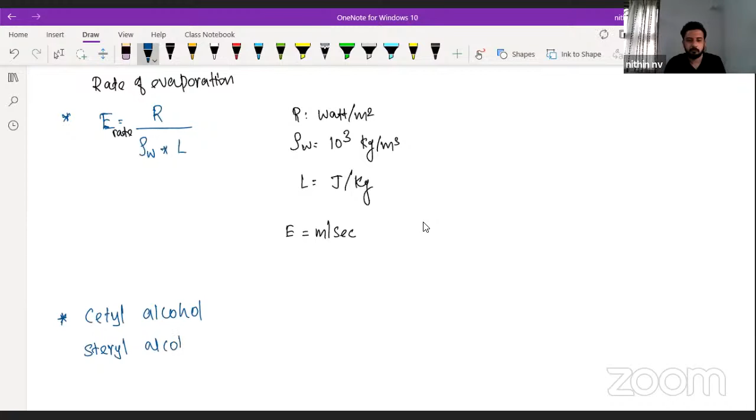This cetyl alcohol is also known as hexadecanol, and stearyl alcohol is also known as octadecanol.

Okay, so these points you can remember. Cetyl alcohol is widely used. These are actually inert chemicals which make a layer on the surface of the water course, so that it reduces the effect of sunlight exposure on the water, so evaporation gets reduced. Suppose something is happening on the water, maybe a kingfisher hits the water, then this layer will break, but slowly that layer will again come and join. It will not affect the quality of the water. It's an inert chemical. You can remember these two, cetyl alcohol and stearyl alcohol, which we use to control evaporation.

Okay, this can be asked for 1 mark. Yes, very good, that's it. So those are the points you have to study under evaporation.

One more point I can tell you regarding evapotranspiration. What is this evapotranspiration? I will tell this in irrigation also. Evapotranspiration sometimes we use as a synonym of consumptive use. Actually speaking, consumptive use and evapotranspiration are a little bit different - the energy which we are using for photosynthesis and all will come in. But in general, evapotranspiration and consumptive use of water can be told as synonyms.

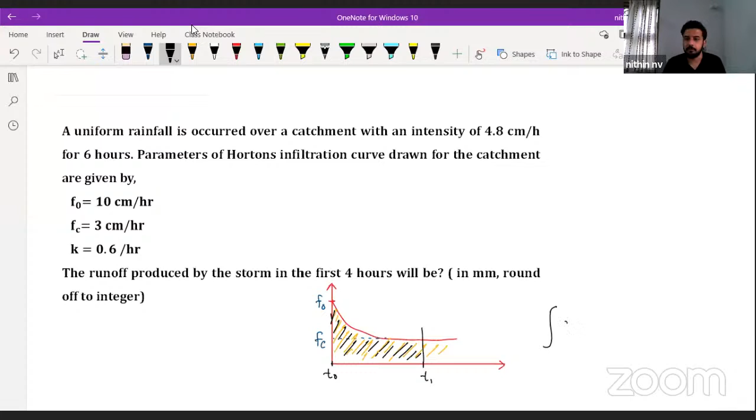Here, the area under Horton's curve, since the y-axis is rate of infiltration, gives us the depth of infiltration. But we don't have a regular shape like a square, so we have to integrate the equation. What is the equation of Horton's curve? Fc plus F naught minus Fc into e raised to minus kt, into dt.

We can put the first one. If I'm putting T1, T2 as lower limit and upper limit, T1 to T2, clear? Now the very important point we have to remember here: this is the depth of infiltration, but we have to note down that whenever we are integrating, the intensity of rainfall should always be above this Horton's curve.

See, when infiltration happens, we should also have rainfall. Without rainfall, we will not be having infiltration. So the intensity of rainfall, or the rate of precipitation, or rate of rainfall - nothing but intensity of rainfall - that should always be above this rate of infiltration or above the Horton's curve. Then only we can directly integrate.

If the rate of rainfall or intensity of rainfall is less than the Horton's curve, then what do we have to do? We have to properly check in what portion it is intersecting. For example, if the intensity of rainfall is something like this - uniform intensity, suppose like this - intensity of rainfall is like this.

Then if we have to calculate the infiltration depth, what do we need to do? We have to select the portion below this curve only. This portion, which is above the intensity, will not contribute - that portion will not contribute any runoff. One second, let me draw that again.

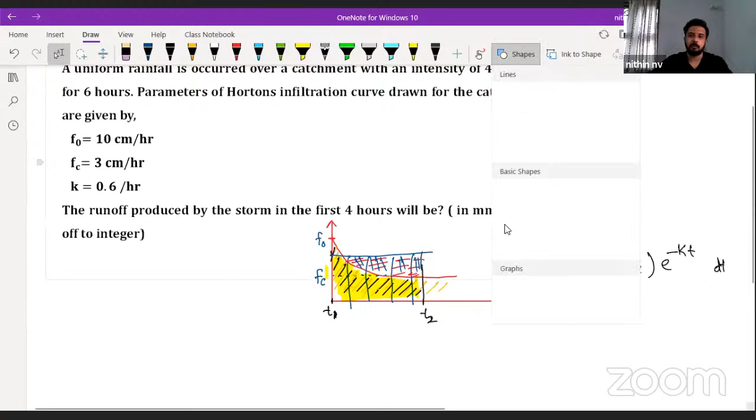We can understand using this particular given data. Then I can draw the large figure, then you will understand, don't worry. So what is the given data?

So something like this: they have given the initial infiltration as 10, final infiltration as 3. Properly listen, it is in centimeter per hour - that is also very important. Finally, they have given that it is 3. Clear? Very good. And what is given in the question?

Intensity of rainfall is 4.8 - yes, this is what I told. Throughout, they have given that the intensity of rainfall is 4.8. So how will it come? Intensity will come something like this - throughout it is 4.8, I'm not marking everywhere, something like this. This is nothing but the intensity. Clear, is it clear everyone?

Now where will we be getting the runoff then? Where will we be getting the runoff then? Which portion will create runoff? Which portion will create runoff? Yes, very good, very good.

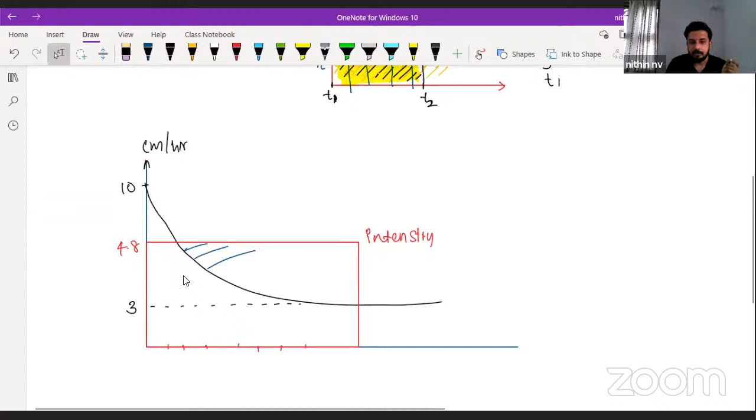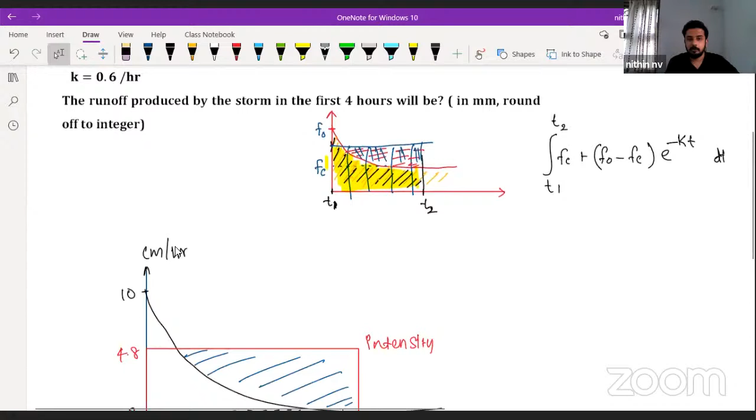After intersection, means only this portion will create runoff. How can we select that? They told that rainfall is happening for 6 hours, but we have to calculate the runoff produced in 4 hours. So 0 here, somewhere we have 4, okay, let it be there.

Can I simply integrate from 0 to 4? That's what we told - no, because in that particular duration, there is no runoff being produced. There will not be any runoff producing. Yes, very good. We have to select, or we have to check, what is this particular time.

Guys, are you following me? Are you able to understand what I'm telling? So this time we have to find, and we have to integrate for that particular time t. If I'm putting somewhat t1 to 4, then Fc plus F naught minus Fc into e raised to minus kt dt. Are you following? Everyone please comment. Okay, very good. So how can we calculate that time?

How can we calculate at what time we are getting an intensity of 4.8?

We can use Horton's equation. What is Horton's equation? Infiltration at any time t is equal to fc plus f naught minus fc into e raised to minus kt. That is Horton's equation, and that is what we are integrating. Then we got that value, we are substituting here.

4.8 is equal to fc which is 3, plus 7 into e raised to minus k. What is k? Horton's constant, given that 0.6 per hour. So 0.6 into t. All data is available, only unknown is t.

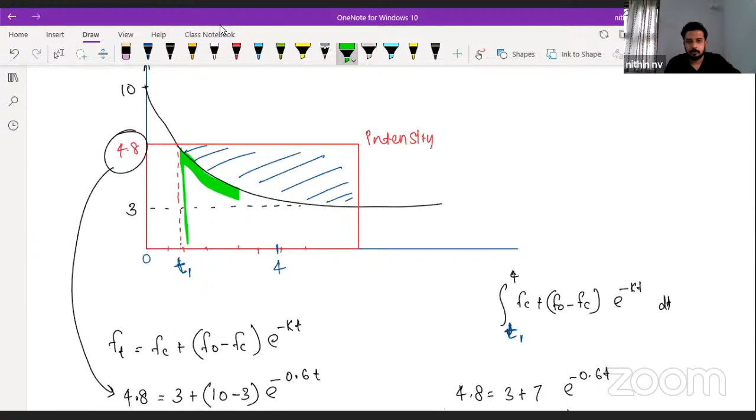Now see what we actually get while doing this step. Infiltration - what we want to calculate is runoff. How can we calculate it? What we actually got is this shaded portion, area under Horton's curve from 2.26 time to 4. This is what we already got just now. But what we need to calculate is runoff. Runoff is this yellow portion. How can we calculate this runoff?

Not till 4, okay I'm writing till here. Okay let it be, intensity of rainfall is again there till 6. Yes, very good, okay very good. So how to calculate this then? How to calculate this runoff? Out of this total rainfall, this much portion below this Horton's curve is going as infiltration. Now the remaining portion will come as runoff: precipitation minus infiltration. Now how can we calculate the precipitation then?

Intensity into time, we have already seen that. What is intensity? 4.8 centimeter per hour. Then what is time? Very important, don't simply put it as 4 hours and all. 4 minus 2.2635, within that particular interval. Don't make a mistake finally. Then how much are you going to get? Precipitation will be around, are you getting 8.3352? Okay, thank you.

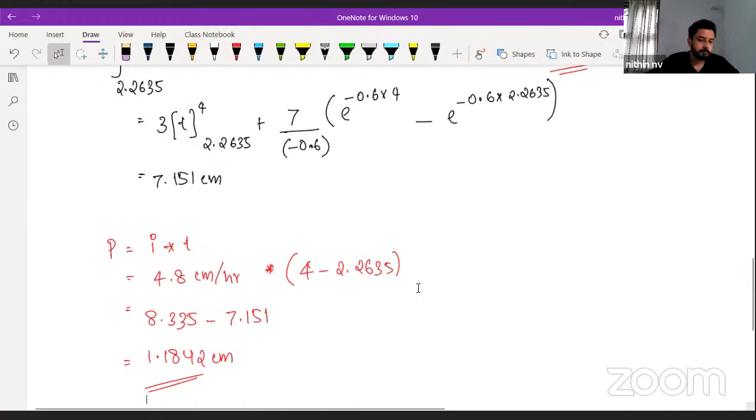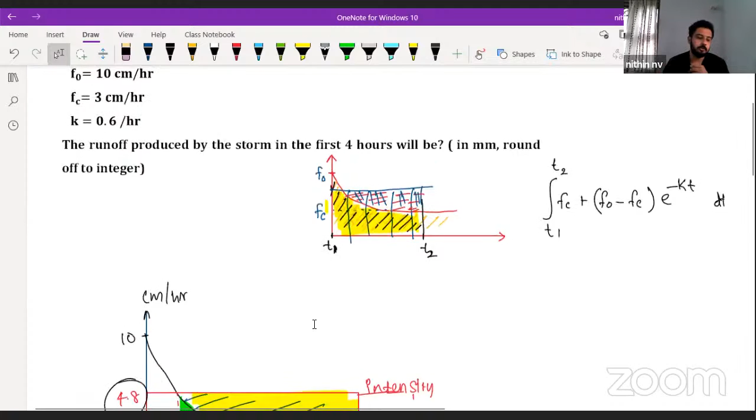What is the value you are going to substitute? Round off to integer. So what answer are you going to type there? Are you going to type 1 or 2? You can type either 1 or 2, no problem, because you are going to get 0 marks. Why?

Very good, it is asking in millimeters. Properly note down: all the data is in centimeters, but they are asking in millimeters. Very, very important, the unit is very important in hydrology. Easily they can deviate you.

So that is equal to 11.842 millimeters. Either you can put 11 or you can put 12, or they may give you a range, 10 to 13, or 10 to 14, like that, since so many calculations are there. So properly look at the units in which they are asking. Very, very important, is it clear guys?

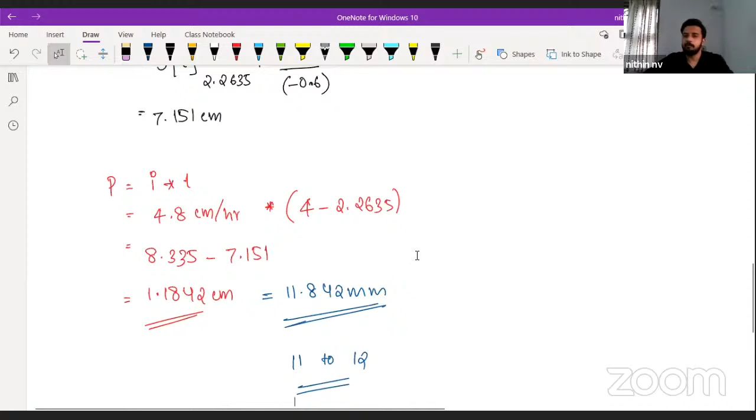This is somewhat a level 3 question of infiltration. Most of the time they may directly give you the data, but this is the next level. Always check whether the intensity of rainfall is more than the infiltration rate or not. If not, then we have to check where it is less than the infiltration rate, and correspondingly calculate that time.

For calculating the runoff, always take the portion which is above the Horton's curve. Below Horton's curve we get infiltration, above Horton's curve we get runoff. There is another name for this runoff — many names are there: excess rainfall.

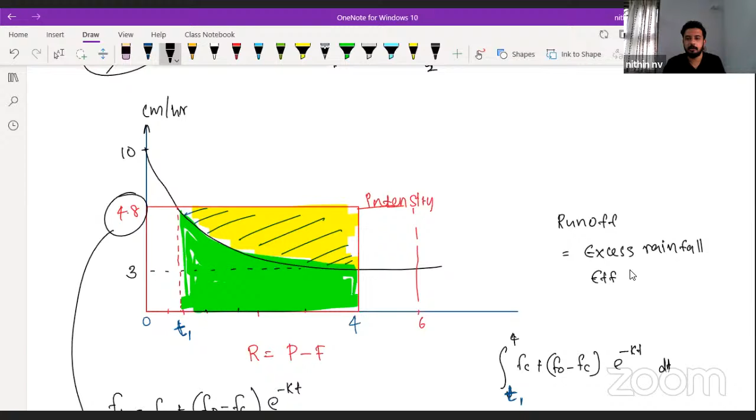Other name is effective rainfall, other name is net rainfall, or rainfall excess — all these are other names of runoff. So this portion which is above the Horton's curve, this much portion, is also known as effective rainfall hyetograph. This yellow shaded portion is also known as effective rainfall hyetograph. By default, hyetograph means rainfall hyetograph, which is of the rainfall depth, but this portion is indicating the runoff. So either we can call it runoff hydrograph, but generally we call it effective rainfall hyetograph.

So 3 points: area under hyetograph is rainfall depth, area under Horton's curve is infiltration, area under effective rainfall hyetograph is runoff depth. Effective rainfall hyetograph means what? Portions above Horton's curve. Is it clear now? Yes, useful rainfall is another name, useful rainfall is also used instead of runoff. Is it clear, guys? All are getting the answer?

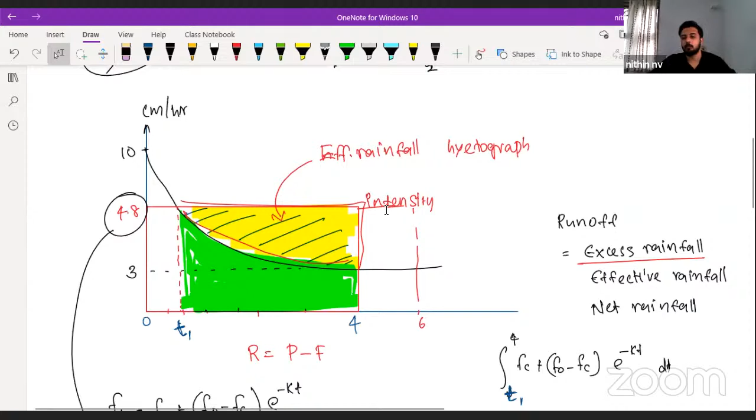Clear now? Yes. So the time for this session is winding up. The remaining portion we can use in the next part. Now onwards you got the basic idea of rainfall, intensity, infiltration and everything, so now we can go a little bit fast. In the next session, happening next day same timing, we are going to study phi index, W index, hydrograph, and other portions also. Since these are the basic portions, we have taken some time; this much time will not be required for the upcoming questions in the next session, because these are the basics. Fundamentals you should properly understand, then only you will not make mistakes in the examination hall.